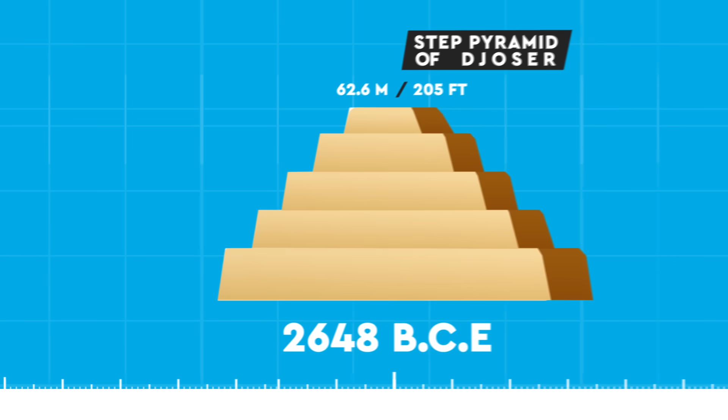From as early as 8000 BCE, mankind has been building towards the sky, and in the last millennia, our abilities to build skyward have gone far beyond anyone thought possible. So, what is the tallest man-made structure to have ever existed on Earth? Here's a clue. It's not what you think.

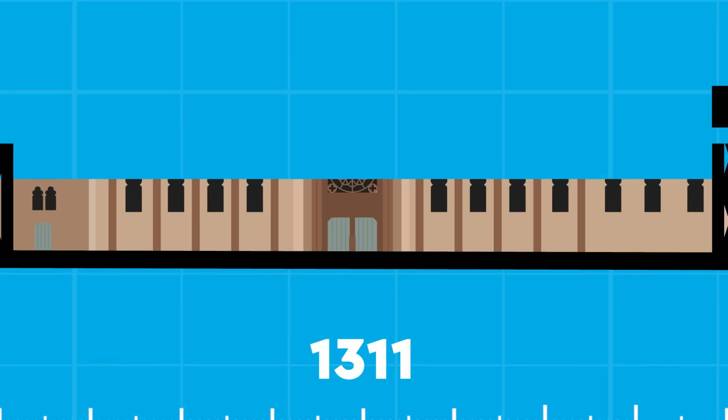The Lincoln Cathedral in England took around 200 years to build and was topped off with a central spire that made the structure 160 meters or 524 feet tall. This prized spire stood for nearly 240 years, and despite a storm causing it to collapse in 1548, a height beyond this would not be achieved again until the late 1800s. Up until this point, religious spires were the exclusive competition for the tallest structure accolade.

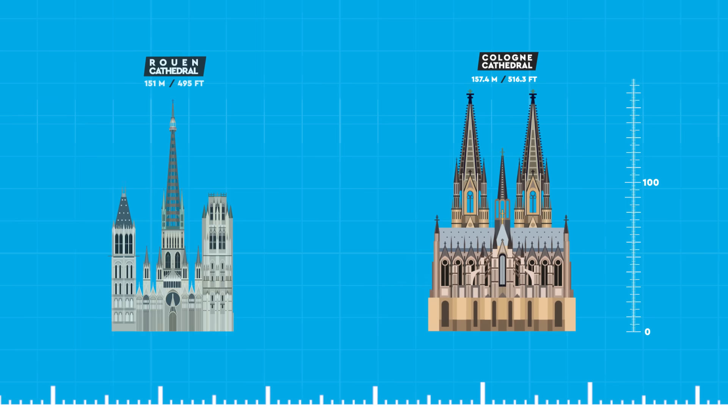But in the District of Columbia, USA, construction to honor the country's first president began in 1848, and over the course of nearly 40 years, the Washington Monument took shape, albeit with a 20-year hiatus in the middle due to political differences that saw the grounds used as a cattle pen. But by 1884, the commemorative structure was erected to a height of 169 meters or 555 feet, higher than even the tallest church spires in the world today.

However, Washington would be utterly dwarfed a mere 5 years later when the French achieved a truly astronomical feat. Designed to be light and airy yet strong, this wrought iron lattice structure was built to celebrate the centennial of the French Revolution. The Eiffel Tower took only 2 years to complete and stood nearly double the height of the Washington Monument at a staggering 300 meters or 984 feet. The metal framework alone weighed around 7,300 tons, and it was coated in 60 tons of paint, which actually needs recoating every 7 years. But while the tower is today an icon of the Parisian landscape, the structure was originally due to be dismantled and scrapped only 20 years after its completion.

So, to prove its worth to the city, its designer Gustave Eiffel mounted a broadcasting antenna on top, which not only became invaluable to military transmissions and later TV and radio broadcasting, but eventually pushed the tower's overall height above 1,000 feet, hitting 324 meters. But that didn't happen until 1957. At its original height of 300 meters, the tower held the tallest title for more than 4 decades.

During this time, across the Atlantic, the craze for skyscrapers had begun to populate the city skylines of America, and Walter P. Chrysler commissioned a building of his own namesake to be the tallest in New York. However, a rivalry emerged with the Bank of Manhattan, who too wanted the tallest building in New York. A construction competition commenced. After a dangerously rapid 2 years and a spire that was made in secret to overshadow the competition, the Chrysler building proved the tallest in not just New York, but the world. At 77 stories, this epitome of Art Deco design stood at nearly 319 meters or 1,046 feet. However, this beauty of a skyscraper soon stood in the shadow of what is now one of the most famous structures of all time.

So, just 1 year after the Chrysler Building's completion, and named after the New York State's nickname, the Empire State Building was designed to be the world's first building to rise more than 100 stories high. The construction of this building proved an important source of employment for New York during the Great Depression, and saw up to 3,400 people a day working on the project. Although it was higher than the Chrysler Building, it was built quicker than anyone could have anticipated. It was finished under budget and ahead of schedule in just 410 days.

Originally designed to be a mooring station for airships, its crowning spire took the total height to an enormous 381 meters, or 1,250 feet. With the addition of an antenna in 1950, the Empire State Building stretched another 222 feet, or 68 meters, into the sky.

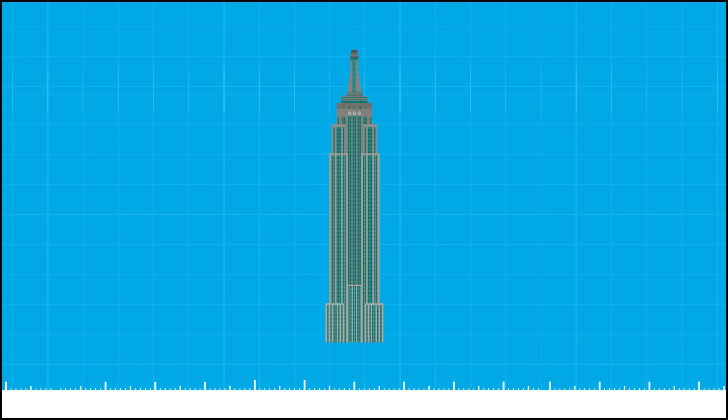But, with or without this addition, the king would still have been dethroned by an unlikely challenger only a couple of decades later. Because oddly enough, over the following years, this tallest title wouldn't pass from one gigantic skyscraper to another. No. Instead, the iconic Empire State Building was topped by an unlikely and less elegant contender. You see, by the mid-1950s, a phenomenon called television had gained ground in the USA, and new structures needed building to enable networks to beam their shows all over the country.

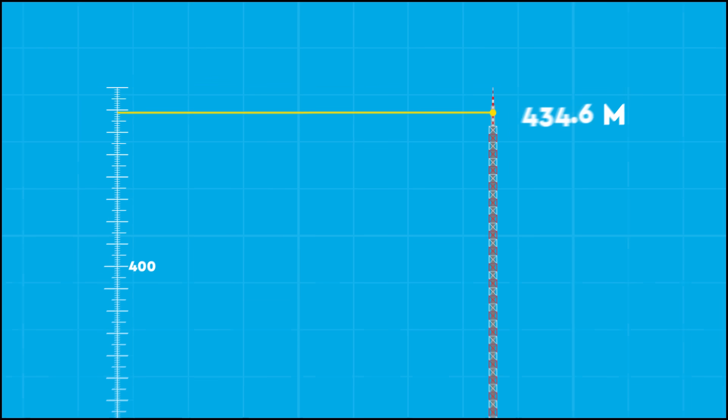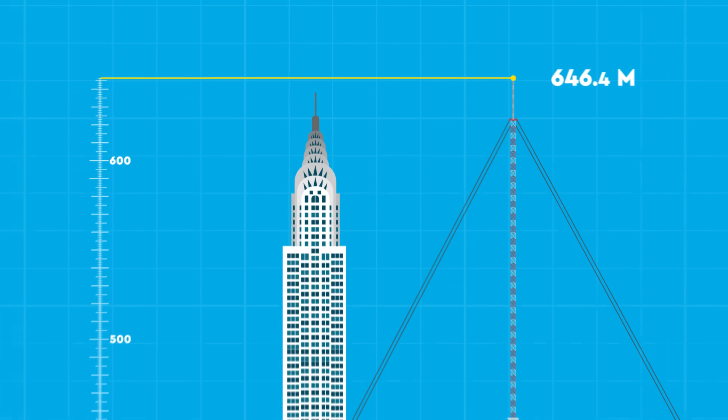Over the following decades, as television consumption increased, so did the height of these masts, and the title was passed through a variety of radio and TV towers, culminating with the Warsaw radio mast in Poland in 1974. This thing stood more than twice as high as the Chrysler Building, at a whopping 646 meters, over 2,100 feet. Built to essentially broadcast the success of the communist rule, the mast was so powerful it could transmit as far as the United States and Australia. But despite the mast's collapse during high winds in 1991, another structure wouldn't reach these dizzying heights until 2010.

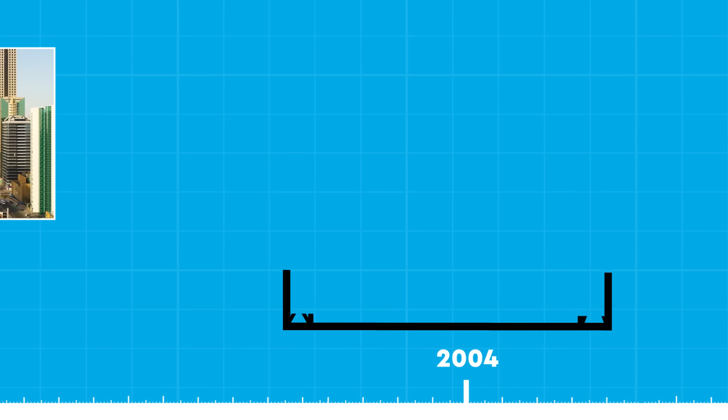Here we find ourselves in Dubai, a city that was originally built on fishing, pearl diving and maritime trade, and it existed mainly at a 2-story level. But independence from the British in the 1970s, combined with an oil boom, saw a new city centre form of man-made marinas, beaches and lakes, surrounded by skyscrapers. But construction on the jewel in Dubai's crown didn't begin until 2004, and would see a structure reach higher than anyone had thought possible. Designed to be not just a super tall skyscraper, but a vertical city, and its neo-futurist style wasn't just for aesthetics.

The stepped columns that rise up around the central spired structure are actually designed to deflect wind from the building. But the interesting force that we're dealing with here is not that this enormously tall building could be blown over, but instead be sucked over. As wind hits one side of the tower, it sheds and forms whirlpools of air on the opposite side. The wind stresses that these vortices create can cause a building to rock side to side and damage the structure. The changes in shapes of the Burj Khalifa at differing heights essentially confuses the wind, so there's not one concentrated force. It's almost like you have several different buildings with height, and each one of them has different vortices shedding at different wind speeds.

All of those things can't happen at the same time, so what you're left with is very little vortex shedding. Standing more than double the height of the Empire State Building, the Burj Khalifa was completed in 2010 and stretched to a previously unimaginable 2,716 feet or 828 meters high.

While competition may take the limelight in years to come, with the likes of Saudi Arabia's Jeddah Tower being constructed to 1 kilometer up from the Earth's surface, the subsequent years have seen the Burj Khalifa stand proudly as the world's tallest building. But wait! Building! We're looking for the world's tallest structure. What if there's a category of structure that we've completely missed?

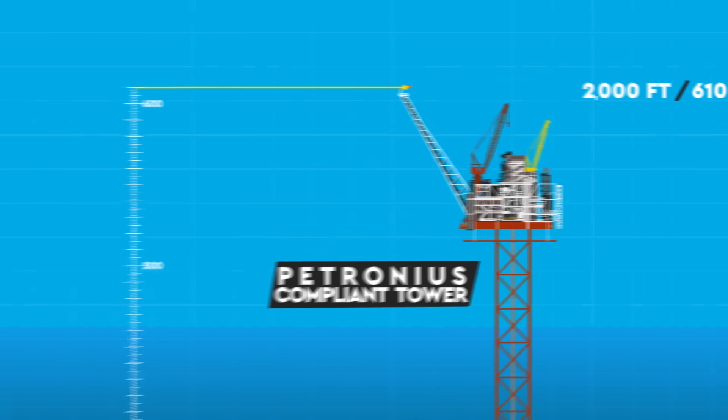Well, let's rewind just a few years back to 2007. Before the Burj Khalifa had been completed, here in the Holy Bible of Records, the great adjudicators of Guinness World Records declared something rather unexpected as the world's tallest freestanding structure. 210 kilometers southeast of New Orleans, a tangled metal tower stood taller than any structure before it, except this thing stood underwater. With its entire structure weighing more than 50,000 tons, the Petronius compliant tower rose 2,000 feet, that's 610 meters, up from the sea floor.

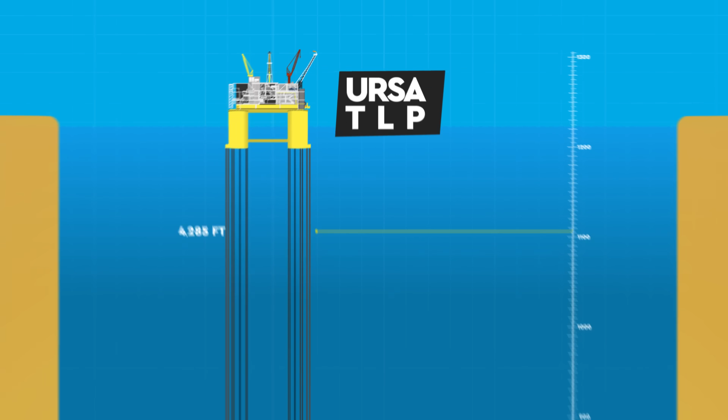Towers like this are designed to be more flexible than traditional land structures and can cope with a 2% sway of its height. By comparison, most buildings on land are designed to withstand a maximum of 0.5%. 2 years later, another type of oil platform, the Ursa tension leg platform, seized the title with a total height of 4,285 feet. That's over 1,300 meters, and taller than the Burj Khalifa with the Empire State Building balanced on top. The structure includes 16 tendons of 3,800 feet or 1,200 meters in length, and each tendon has a 32-inch diameter and weighs 1,000 tons.

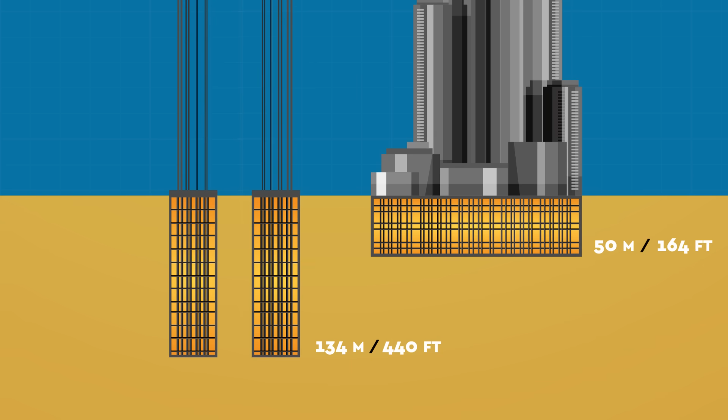The foundations of these tendons go a further 134 meters or 440 feet into the ground. And although we're not counting foundations, for comparison, the Burj Khalifa only goes 50 meters or 164 feet into the ground. This monolith of a structure is designed to remain steady in the ocean and can simultaneously withstand hurricane-force waves and winds. A further 2 years later, another structure of the same design superseded it, with the Magnolia ETLP being declared the world's tallest structure, extending more than 1,400 meters or 4,700 feet up from the sea floor.

Now it's been debated whether underwater structures are eligible for this accolade. The big difference between a structure like this and that of one on land is that a building or tower is held up by means of a rigid steel and concrete framework. Instead of being held up, a tension leg platform is being held down using steel tendons. But to clear the matter up, Guinness World Records have stated, if height is defined as the distance that a structure extends upwards from the Earth's surface, then the Magnolia Extended Tension Leg Platform in the Gulf of Mexico is the world's tallest man-made structure.

Since then, Bigfoot is the latest platform to extend even further, to over 5,000 feet or nearly 1,600 meters. If you stacked up two Burj Khalifas, only the tip of the second spire would be poking above sea level. But what of the future? There's a limit to how deep you can go in the oceans, but there's no real limit to the skies. Enter the Clouds Architecture Office. In 2017, these guys proposed a structure that is nearly out of this world. They have designed the world's tallest structure to be hung from an orbiting asteroid 50,000 kilometers above ground. Yep, you heard that right.

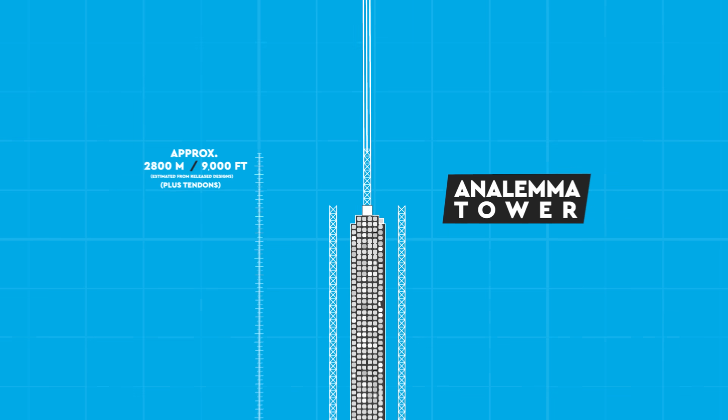The actual height of the Analemma Tower is yet to be specified, but it would be made up of offices and residential units and would essentially be an elevated floating city. I would love to see it built. However, I don't think I'll be alive when it happens.